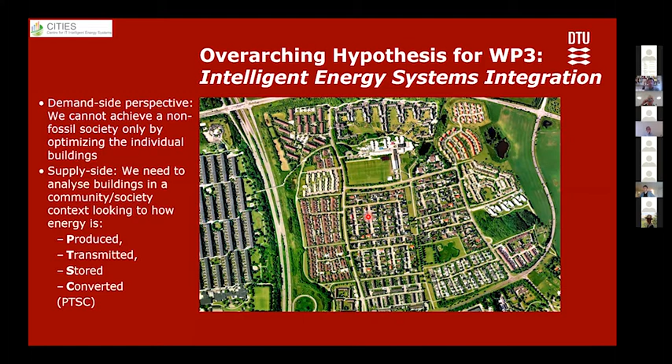are so extremely different. On the other side, the supply side, we need to analyze buildings in context with the possibilities to provide energy and to distribute and store energy, etc., on the societal level. So this leads to how buildings are able to supply energy flexibility. As I already said, it's not enough to look at individual buildings. We need to look at them from an aggregated perspective.

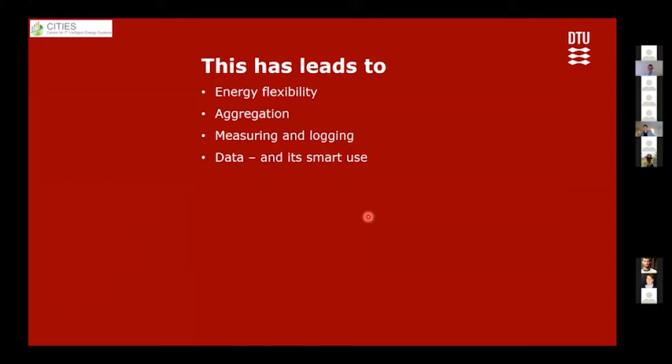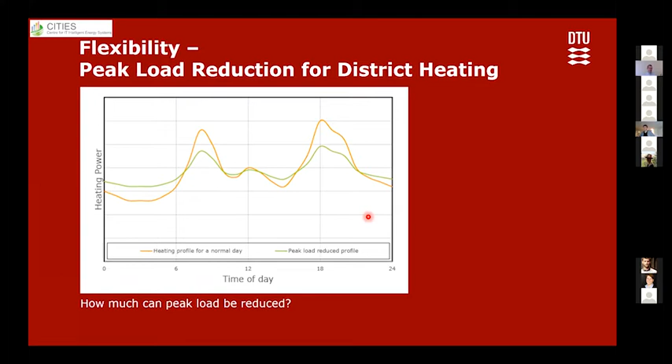And what we should talk most about in this short presentation is how we can monitor things that happen in buildings and do smart things with the data that we can collect. But first of all, about flexibility, we've seen pictures like this frequently before, but very often it's a matter of reducing the peak demands and having the demands match the supply situation as much as possible. So peak minimization is one issue that buildings can significantly provide to the energy system in society.

So from a building perspective, what we can do is use the possibilities for buildings to be well thermally insulated and in this way energy upgraded, but also to use the thermal mass that we have in buildings for heat storage and thereby energy storage. Just a few examples of how we have analyzed that. We have two generations of old houses, a very old house, which is more than 150 years old.

If we want this flexibility, what happens if the district heating provider cuts off the heat provision for a number of hours, what will happen to the thermal comfort of people in these houses? For the old house, it takes about 2.5 hours before they will begin to freeze. For the other one, significantly newer, but still relatively old from today's perspective, it's only 1.7 hours. The one from the 60s may be better insulated, but has less thermal mass. So that's some of the things we are considering.

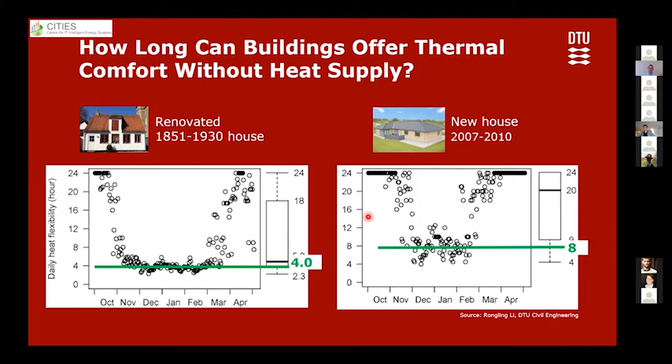But we can improve the houses. So even the old one from the 1850s can have an increased number of hours that the heat can be cut off if it's renovated. Before it was 2.5 hours, now it's 4 hours. And the new house may not have so much thermal mass, well, it depends, but it's much better insulated, and the occupants can sustain 8 hours without heating. So that's something worthwhile analyzing.

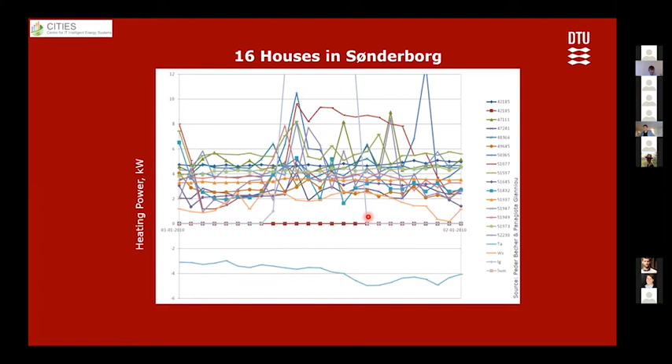I've said a couple of times already that buildings and users are so individual. So here's a study where we looked at 16 houses in the town of Sønderborg in Denmark. And you can see how different the patterns of heating power use are over the 24 hours of a day. So we need to see the individual houses in combination. We need to focus on aggregation.

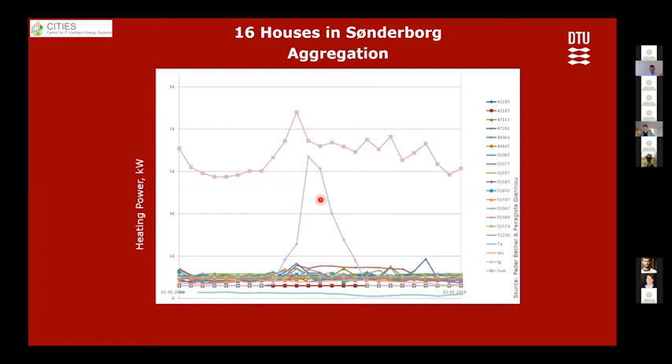And then we get the pale rose curve on the top that we should be focusing upon, but we can see in the bottom how each of the individual buildings contribute. So that's something we must consider. By the way, the light blue curve is the solar gain. So that's also worthwhile considering: how is the situation with the outdoor environment? Now, there are individual possibilities of different patterns.

If we can shift them somehow, you can use the physical thermal storage in buildings, but just by shifting, it's also something we can control when we look at the aggregated pattern. So this kind of virtual storage by intelligently shifting the profiles could be useful. And if we can model the future some hours ahead, that would also be beneficial. So model predictive control is also an issue we've been looking at in Work Package 3.

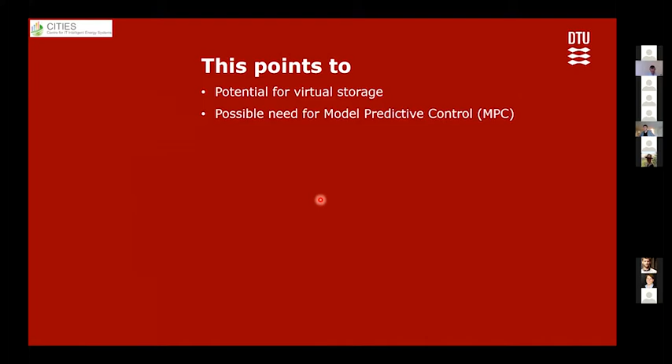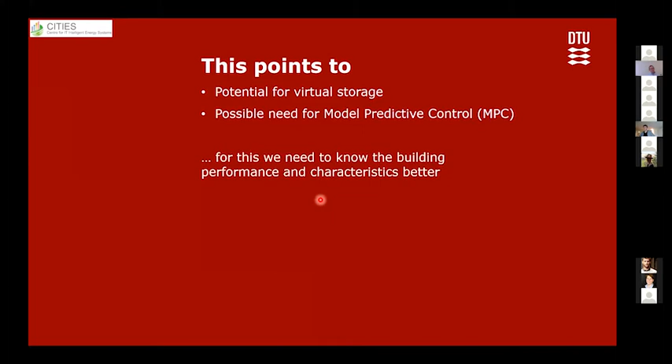So all this leads to the fact that we cannot use it without knowing better the characteristics and the performance of our buildings. And that's the last point I will mention before I hand the word over to Christoffer: the necessity to measure. So in all these houses, we're going to measure and monitor what's going on. And that goes along with recent incentives from the European Commission. Many of you may know the Energy Efficiency Directive.

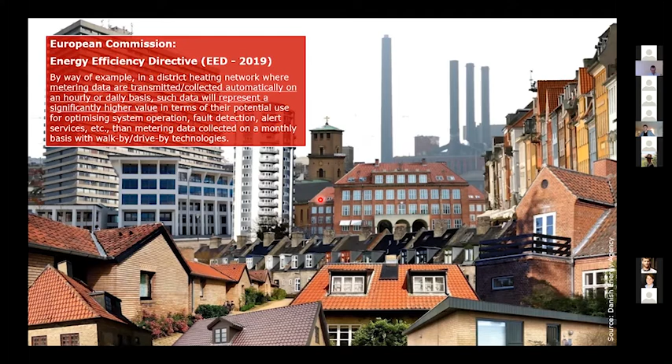I'll just read aloud a few words: by way of example, in a district heating network where metering data are transmitted and collected automatically on an hourly or daily basis, such data will represent a significantly higher value compared to if we had monthly data, as it says at the bottom of this text here.

Also the Energy Performance of Buildings Directive, the amendment that came two years ago, talks about having digital solutions in the built environment, which will give us better opportunities for energy savings first of all, but also, by providing consumers with more accurate information about their consumption patterns, enable system operators to manage the grid more effectively.

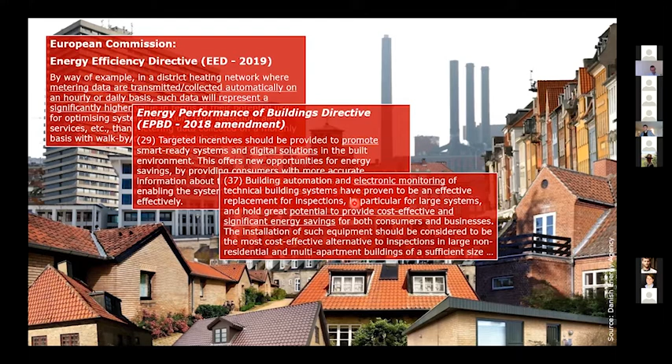Yet another piece of text that I think is interesting, also in the EPBD directive, is that we should have electronic monitoring, which would provide the potential for cost-effective and significant energy savings. And the last piece of text from the EPBD directive is about the incentive for non-residential buildings, that they should have building automation and control systems capable of continuously monitoring, logging, analyzing, and allowing control of the energy use.

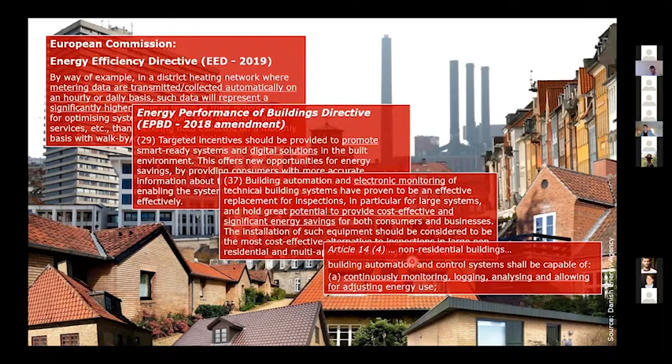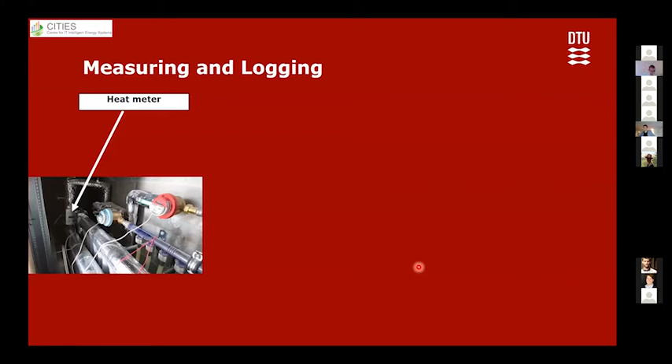This is for non-residential buildings, and there's a similar clause for residential buildings which will come afterwards. Now, all this leads to the need for measuring, logging, and monitoring our buildings. We can do it with heat meters. We can have indoor climate sensors. We can have motion sensors that detect if we are present, but also detect the motion of our windows and doors, etc., if that matters.

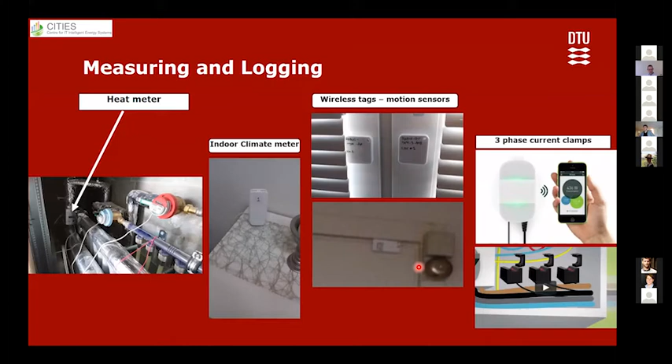And we can also have clamps that register our electricity use as well. So it can be extremely extensive what we need to measure. And the list is even longer, with outdoor climate of course. We can make thermography of our buildings, know about the air tightness. We can measure so many things, and we are on a path where we are doing this more and more.

But gee, this can be extensive, and do we really want to live in such buildings? It's expensive for the building owners, and maybe bothersome for us who live in and use the buildings. So in the project we have developed a concept whereby we can use mathematics and statistical methods so that we don't need so many sensors, but can use few sensors and collect data from them in an intelligent way, as long as we collect data with a high frequency.

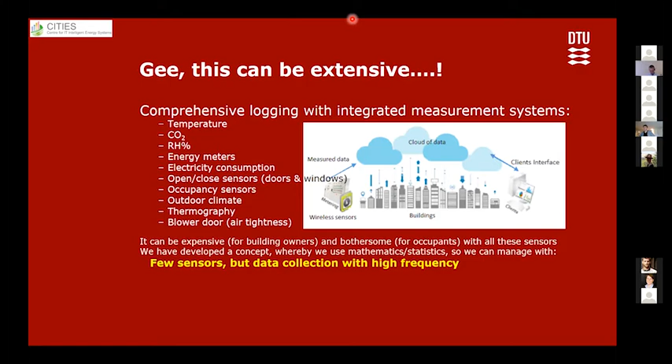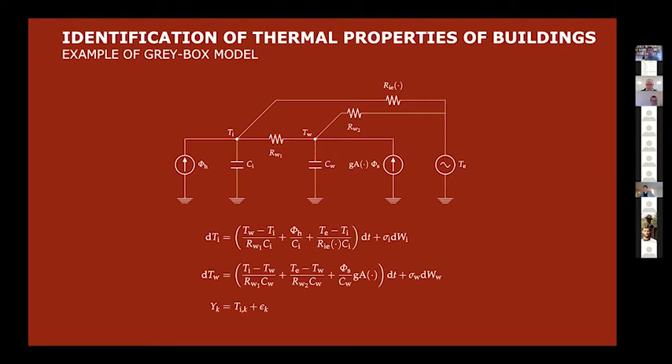Okay, so in continuation of Carsten's words, I'll show you a few examples of how we can actually estimate some thermal performance parameters of buildings. One example is a grey box model based on stochastic differential equations. This picture shows a schematic overview of a deterministic system where we have some heat input, outdoor temperature and solar gain. From that we can estimate a number of parameters and actually functions, which are embedded in these formulas here. If we look in here, we can see these highlighted variables.

They're actually parameters. The R's here are the thermal resistances of the building, which are at least to some extent unknown. And we have some heat capacities, which of course are very related to the flexibility of the building. We don't know these parameters exactly, but from data we can actually estimate them, both as constants and also as functions.

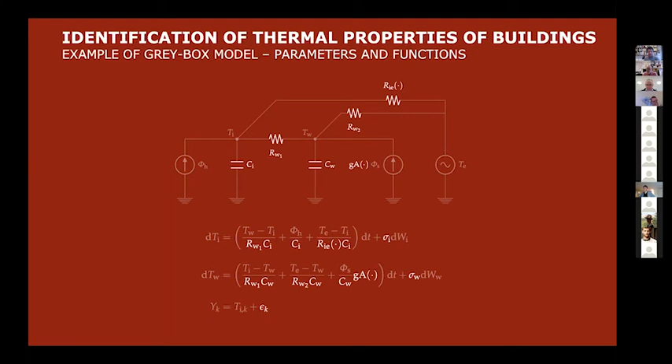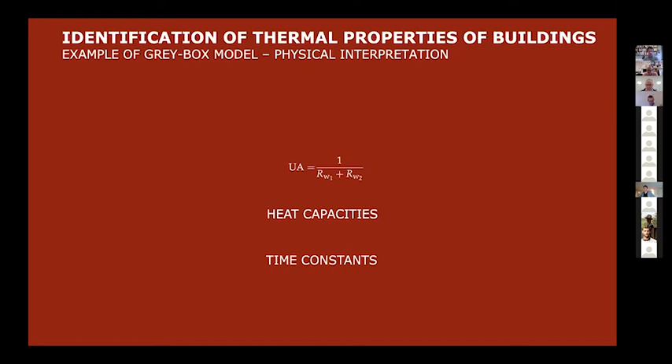In one of Carsten's slides, he mentioned the solar gain in the building as a rather important factor, which we have actually worked on. Some of the parameters here are the heat loss coefficients, which we can calculate from the thermal resistance of the building. We can get the heat capacities directly from the model, and we get time constants.

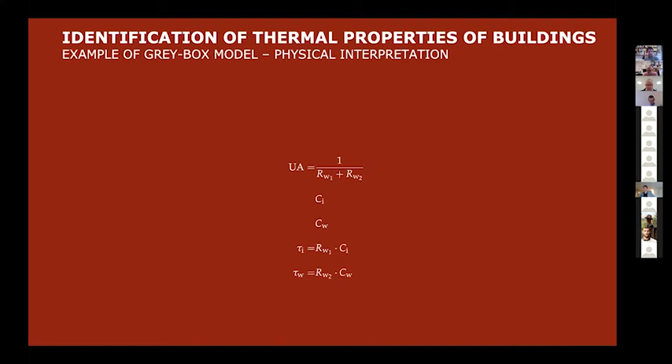And beside that, as I mentioned, we can also estimate some functions which are actually unknown to us in the beginning. So in this case here, this is just an example showing, getting an idea of how it works. It's not exactly how it works in the gray box model, but let's take a look.

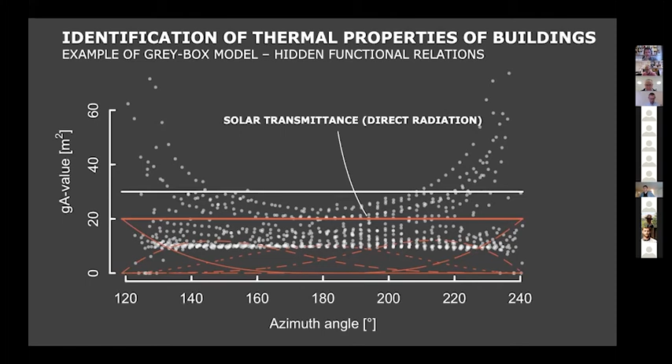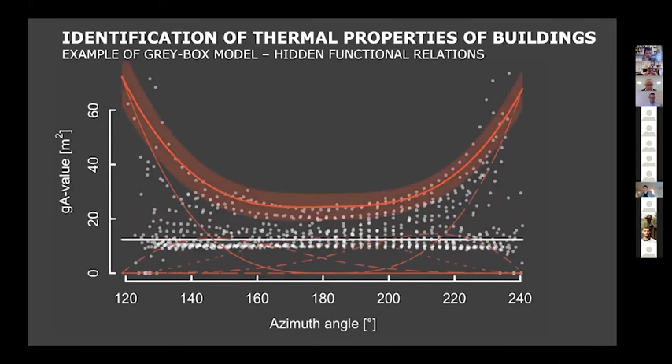So here we would like to estimate how much solar gain we get into the building during the day, or in other words, depending on where the sun is positioned. So here we estimate a constant for all the diffuse solar gain getting into the building, and the red line here, that's the solar gain from the direct radiation, which is estimated by a spline. And you can actually see it here in this animation, how we can optimize these functions to actually estimate how much solar gain we have in the building, like this. We have published a paper about this in this one.

And another method, which is rather different. I mean, we still estimate the parameters related to the thermal performance of the building, but in a very simple way in terms of how much data you actually need and so on. So in this case, we have tried to go in and say, okay, what if we only have the heat consumption for the building and the weather data? What can we actually do?

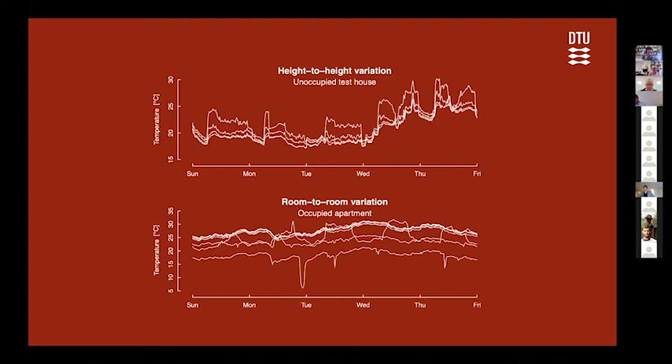And the reason for that is, first of all, that we would like to reduce the number of sensors in the houses because it's expensive. They can fail and so on. And the other thing is that the indoor temperature, for instance, which is often very critical to obtain to do these models, it's actually not that easy to measure. I mean, it's not difficult to measure, but it's difficult to measure the representative indoor temperature.

So in the first example up here, this is an unoccupied test house, but we have measured the temperature in different heights in the same room, and we observe a temperature difference of up to 5 degrees. In another example, which is an actual real apartment from Denmark, we have measured in different rooms. And we see from room to room, we can actually have a temperature difference of up to 10 degrees, which is really extreme, and that will really affect the estimates from the model if we don't know a good representation of the indoor temperature.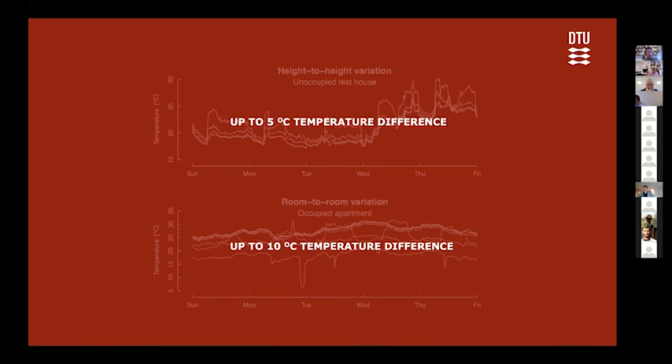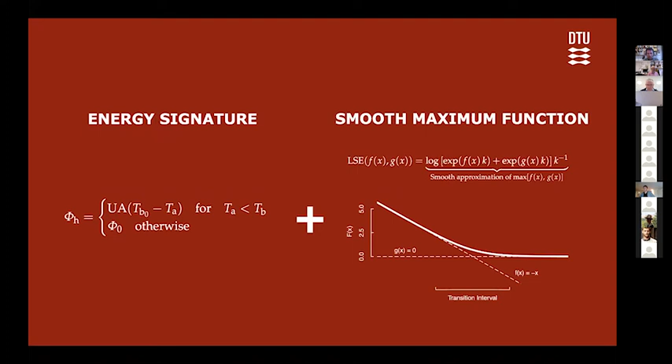So in this model here, we will try to neglect the measurements of the indoor temperature and actually still calculate the thermal performance. And we do that by taking an old method called energy signature and combining it with a smooth maximum function to get a continuous function where we also get an idea about the transition period and so on, and the standby effect in the summer. And from that, we came up with this model where we estimate the daily heat consumption, I should say.

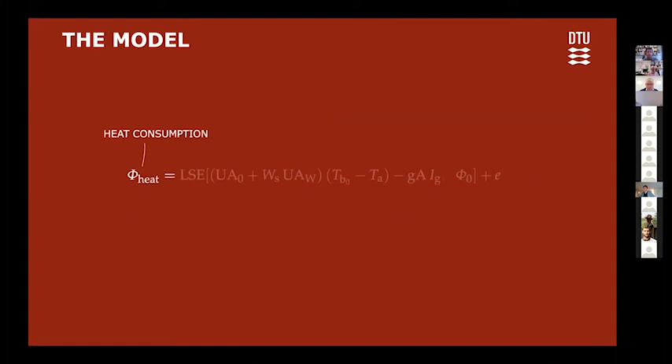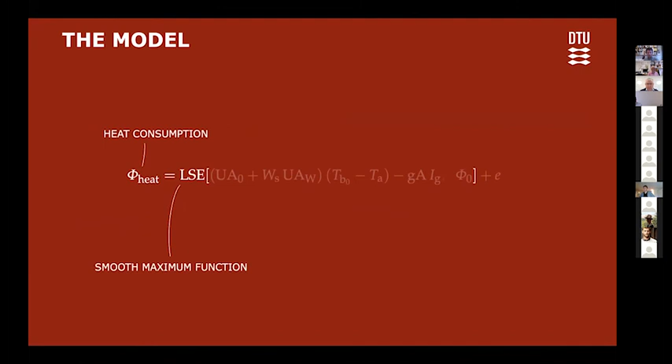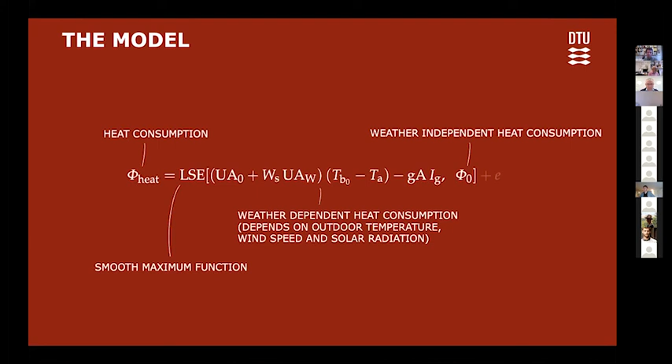And we take this smooth maximum function, it's called a log sum exp function. So we take this function, feed in some input to it, and it can be, in this case, the weather dependent heat consumption. So in this case, it's dependent on wind, outdoor temperature, and solar radiation, and a constant weather independent heat consumption, which is the heat consumption during summer. So that could be related to system efficiency or hot water and stuff like that. And then in the end, we have some noise in the data and the model.

From that model, we can actually predict the heating power day by day. So all the white dots, they are showing the measured heating power, and the grey dots, might be a little difficult to see, but the grey dots, that's the predictions. And this black line, that's a smooth result of the prediction.

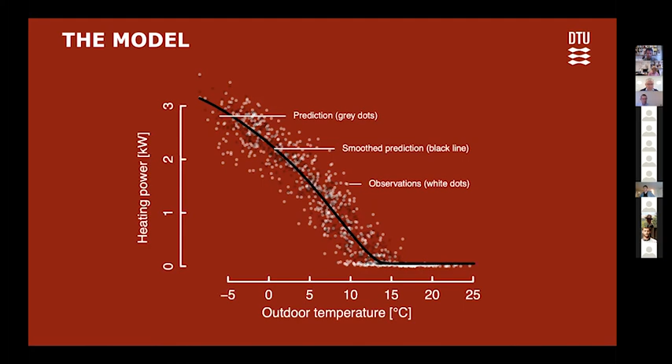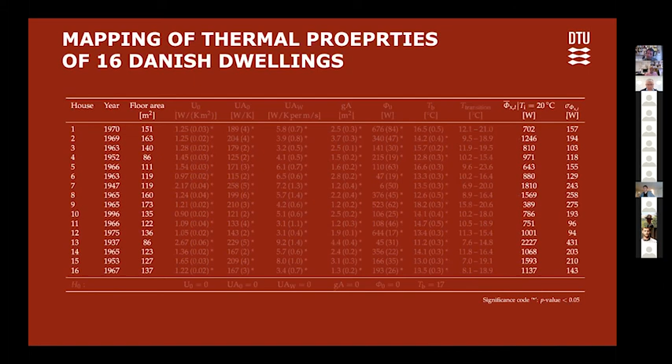So from that, we can actually go in and say something about how well it is insulated, what is the U value. In this case, we have the floor area, so we can come up with a U value and a UA value. We can say something about the sensitivity of wind. So if it's blowing a lot, is it then losing a lot of heat? That might indicate that we have some issues with air leakages and so on. And then we have a gA value, so how much solar energy we get into the house, standby effect, and then some numbers describing the transition period. And finally, we have actually estimated some effects of the occupants.